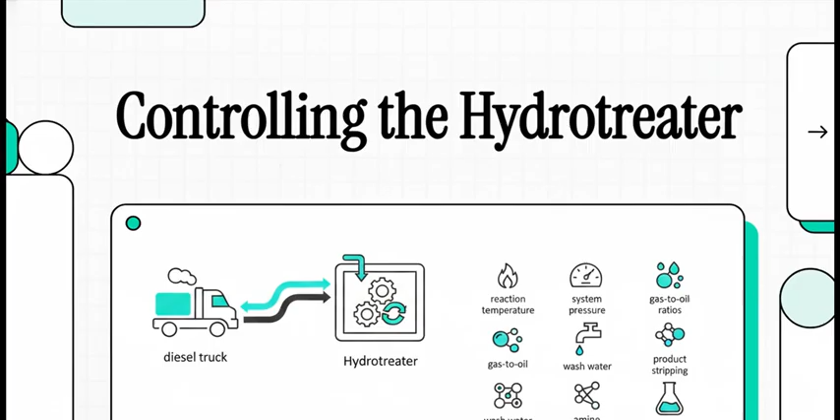You know, every single diesel truck you see on the road is running on fuel that's been through this incredibly high-stakes purification process. So today, we're going to pull back the curtain on the heart of that system, the hydrotreater. It's this absolute beast of a machine that runs on a constant, really delicate balancing act of temperature, pressure, and chemistry.

So let's start with a really basic question. Why is your diesel fuel so clean in the first place? Well, it's because the stuff that comes out of the ground, crude oil, is anything but. It's a raw, messy, complex soup that needs a major cleanup.

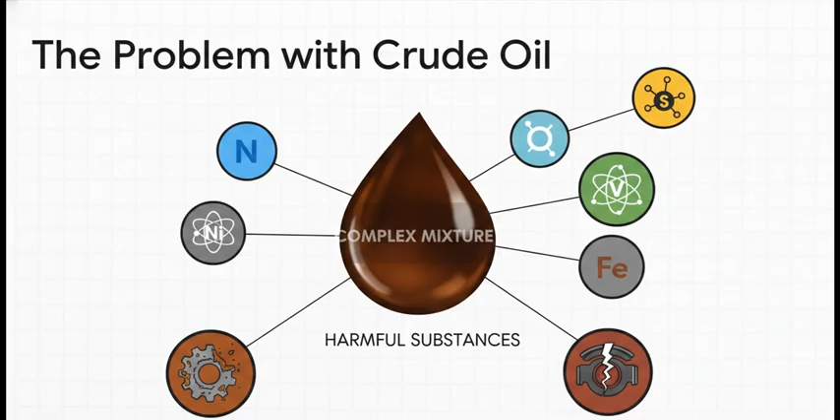See, raw crude oil is just loaded with junk you do not want anywhere near a modern engine or, frankly, the atmosphere. We're talking about things like sulfur, nitrogen, and even trace metals like vanadium and nickel. These compounds, they're corrosive, they're toxic, and they can completely destroy the expensive catalysts used later in refining. So before it can become fuel, all that stuff has to come out.

And that purification process, it's called hydrotreating. It's a game of precision right from the very first step. It all starts with creating the absolute perfect mixture before the real action even begins. And here is where that precision really kicks in.

Operators have this kind of magic number they live by, around 160. That means for every 1 cubic meter of oil, they need to mix in about 160 cubic meters of hydrogen-rich gas. Now, this isn't just a suggestion. It's a critical control parameter that sets the stage for absolutely everything that's about to happen.

So why that exact number? What's the big deal? Well, it's actually doing 3 super important jobs all at once. First, it stops gunk, we call it fouling, from building up on the super expensive catalyst. Second, it acts like a heat sink, getting ready to absorb some of the crazy amount of heat that's about to be generated. And third, it just makes sure the whole mixture flows properly through all the pipes and heaters. It's the perfect setup for the main event.

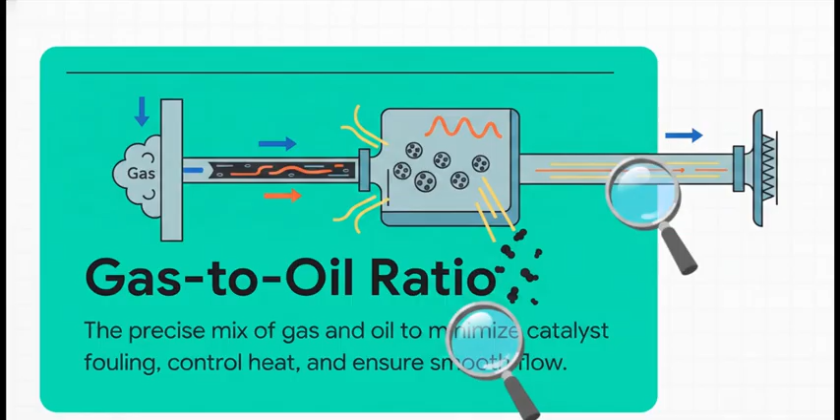Okay, now we're heading into the fiery heart of the hydrotreater, the reactor itself. This is where those contaminants get chemically ripped out of the oil in a series of pretty intense reactions. And managing this beast, it all comes down to one thing: absolute, unwavering control over the temperature.

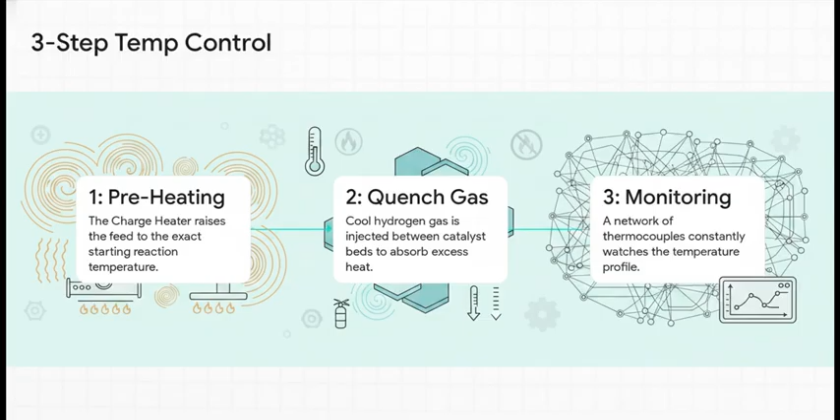So how in the world do they manage it? Well, you can think of it as this 3-step dance. First, a charge heater brings the feed up to the precise ignition temperature. Then, as the reactions kick off and generate this massive amount of heat, cool quench gas is shot in between the catalyst beds. It acts like a fire extinguisher, soaking up all that excess heat and stopping a dangerous temperature runaway. And the whole time, a huge network of thermocouples is feeding real-time data back to the control room, giving the operator a perfect picture of what's happening inside.

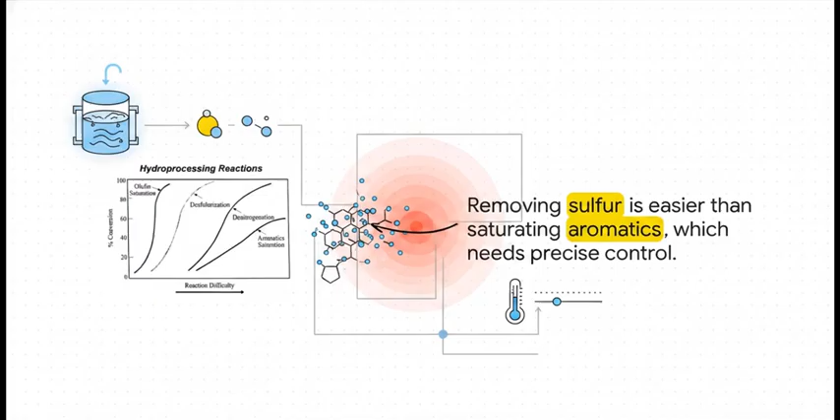That's the tightrope operators are walking. They have to crank the temperature just high enough to hit those difficult reactions, but without overheating the whole system.

Okay, so great. The main reaction was a success. The sulfur and nitrogen are gone. But, in solving one problem, we've actually created a new one. The process itself made some nasty byproducts that are now in the stream, and we have to deal with them, like right now.

So here's the issue. Those reactions created hydrogen sulfide and ammonia. As the stuff coming out of the reactor starts to cool down, these two gases love to combine and form something called ammonium salts. And if you let them, these salts will literally solidify, clogging up and corroding all the equipment downstream, like heat exchangers.

The solution, though, is surprisingly simple, almost elegant. You just inject a stream of clean wash water into the hot mixture. The water dissolves the salts and just carries them away safely before they can cause any trouble.

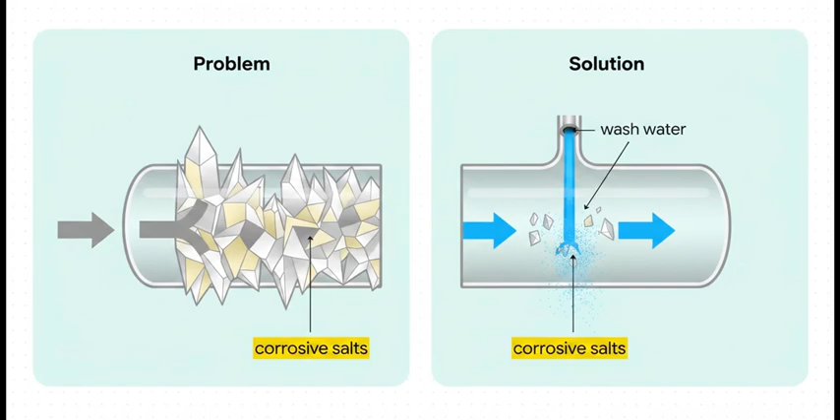But of course, it's not as simple as just hosing it down. There are very strict rules. You need to inject enough water so that it actually stays liquid. Otherwise, you can create some really nasty acidic conditions. You also have to keep that salt concentration below 8%, or it'll start eating away the pipes from the inside. It is yet another example of this incredible balancing act.

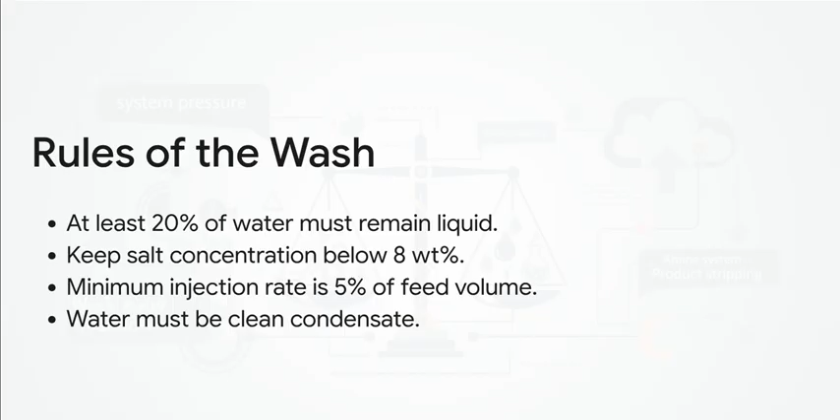All right, we're on the home stretch now. The product is clean, the corrosive salts are gone, but it's still all mixed together. Liquid fuel, water, and that recycled gas. So the final step is to separate everything out and make the product stable. First, the whole mixture flows into a high-pressure separator.

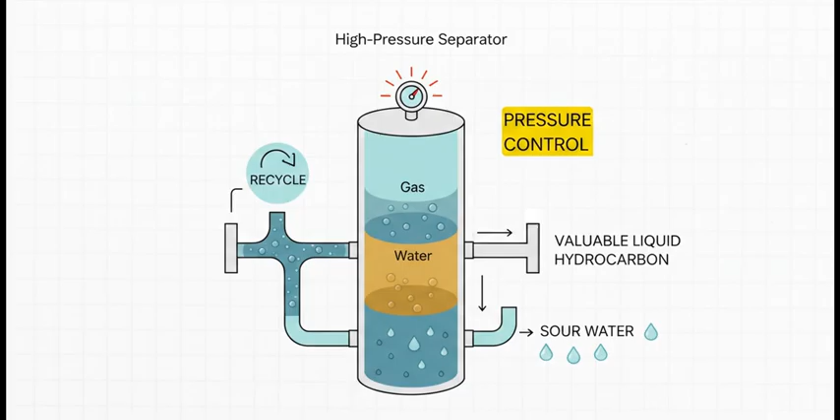You can basically think of this thing as a sorting hat. Using really precise pressure control, it splits the stream into 3 different parts. You get the hydrogen-rich gas, which is cleaned up and sent right back to the beginning of the process. You get the sour water with all those dissolved salts, which goes off for treatment. And finally, you get what you came for, the liquid hydrocarbon product.

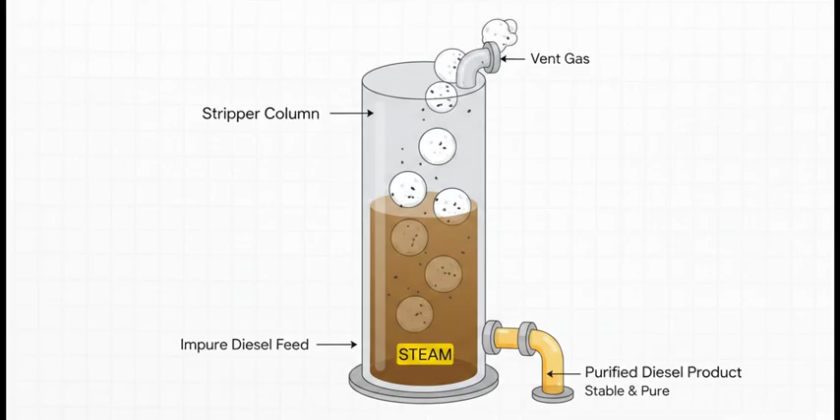But that hydrocarbon isn't quite ready for your car just yet. It heads to one last piece of equipment, the stripper column. In here, steam is bubbled up through the liquid, and it literally strips out the very last traces of any dissolved gases. What comes out of the bottom is the final product, pure, stable, ultra-low sulfur diesel, finally ready for the pump.

So if you pull back and look at the whole process, a really clear theme emerges. Running a hydrotreater isn't about pushing one big button. It's much more like conducting an orchestra, where every single instrument has to be perfectly in tune with all the others. This entire process is just one delicate balance after another.

Take temperature. Too low, and the reactions just don't work. Too high, and you permanently destroy your expensive catalyst. What about the hydrogen ratio? Too little, and the catalyst chokes on carbon. Too much, and you're just wasting a ton of energy and money. And the water wash? Too little means corrosion chews up your equipment. Too much can throw the whole downstream system into chaos. Every single variable is a constant, high-stakes balancing act.

And all of this leaves us with a final big-picture thought. We know that the crude oil that's available to refineries is getting heavier, dirtier, more contaminated, and at the exact same time, environmental fuel standards are only getting stricter. So the question becomes, how will these incredibly precise control strategies need to evolve to meet the challenges of tomorrow?